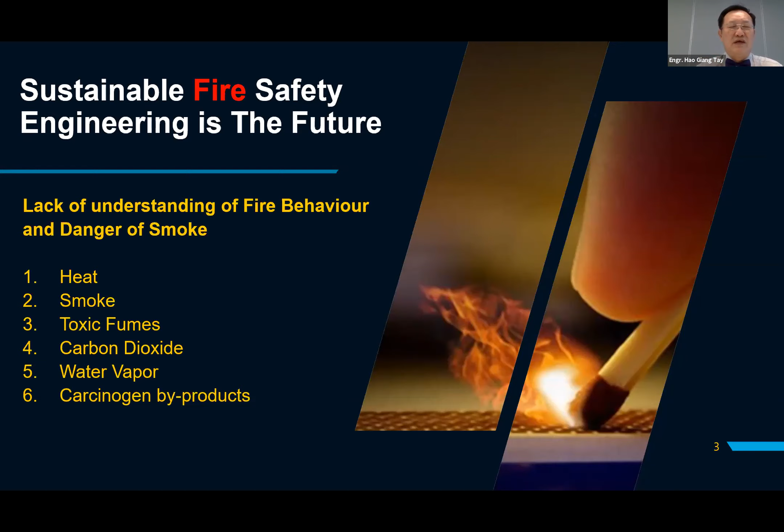Hence, a lot of firefighters in the US and the rest of the world slowly contract cancer years after they retire. Actually, the latest research by UL revealed that whenever they came out of a fire scene, their jackets, helmets, everywhere is deposited with toxic smoke particles. When they undress in their stations, all these particles become airborne and are inhaled. So there are a lot of risks, not only for the occupants but also for the firefighters.

Now, in order to strategize the fire safety design, I think we have to look at fire safety fundamentals. First of all, we need to understand the fire safety principle and the fundamentals. This is the prerequisite for all designs, and hence all these should be introduced during the preliminary stage of any project.

Fire safety design objective: the main objective should also be life safety. If you look at our UBBL, most of the bylaws are actually life safety priority. Then you also need to understand UBBL 1984 with Amendment 2012, and the Code and Standards.

But then, do you think full compliance to building regulations, codes, and standards really gives you a safe building design? It's not necessarily so, because there have been a lot of studies done over the years, and we find that at times you need to go beyond the regulations and standards. That is because until you understand the fire risk and fire hazards within the building you're going to design, there's no guarantee. I'll give you a good example.

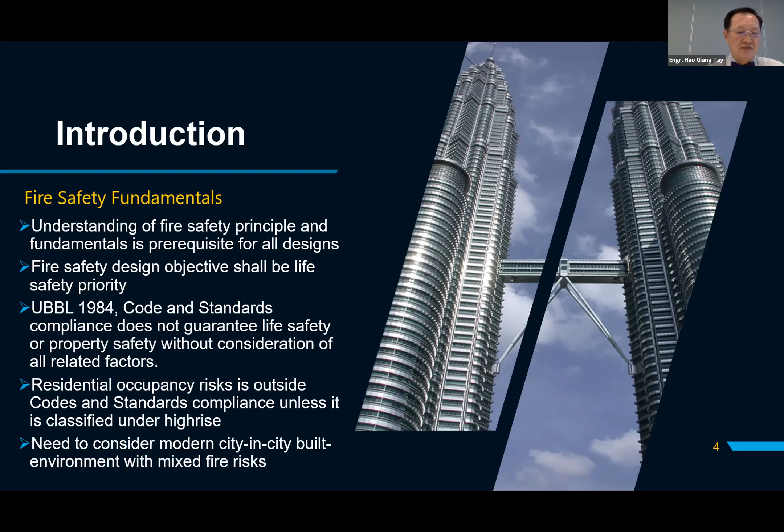Currently, residential occupancy risk is also outside code, standards, and regulation, unless it's high-rise buildings. And we are still arguing whether to put in smoke detectors, whether there should be a sprinkler, and all that. I'll leave it for other platforms to debate on this. Also, we need to consider modern city-in-city built environments with mixed fire risks, and it has been proven in many fire incident cases around the world, including in Malaysia.

If you look at our current building regulations, also in the rest of the world, they are all prescriptive based. Now, prescriptive based codes and standards or regulations are actually good for normal standard buildings. But if the risk goes beyond the parameters defined by the prescriptive code, then you need to look at a performance-based approach. Having said that, even prescriptive design, you still need to look at fit for purpose and performance approach, because gone are the days whereby you just take a data and design according to it and hope for the best. It doesn't happen that way.

So deemed to satisfy design may not work at times, depending on the type of building. Design concept must be fit for purpose. That means it's not just assuming that it's going to work, all right?

Fire hazards and fire risks at the moment are not factored in, because if you're given a building, architects just design according to what they call data given or specified in the regulation, UBBL. I'll give you another example.

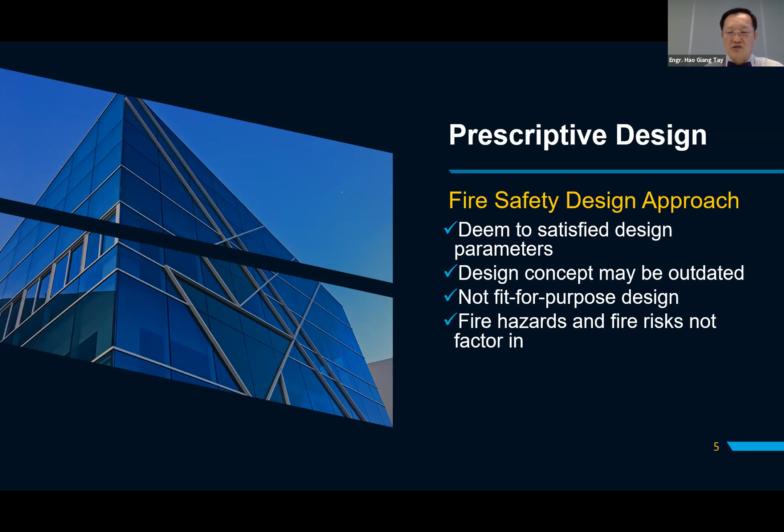If you were to design, let's say, an egress path, normally you look at floor density and then you look at what is the width of the protected corridor, egress path, including staircase. In my second chapter this afternoon, I will show you that that is not sufficient, okay? Because we never take into consideration human behavior.

There are limitations for high-rise or mega-sized projects. We all know that if you look at compartmentation, it's impossible to design a mega-sized shopping mall or a sports complex, or even for that matter, any transportation hub. Airport terminals nowadays, if you look at even the rail terminals, they're huge.

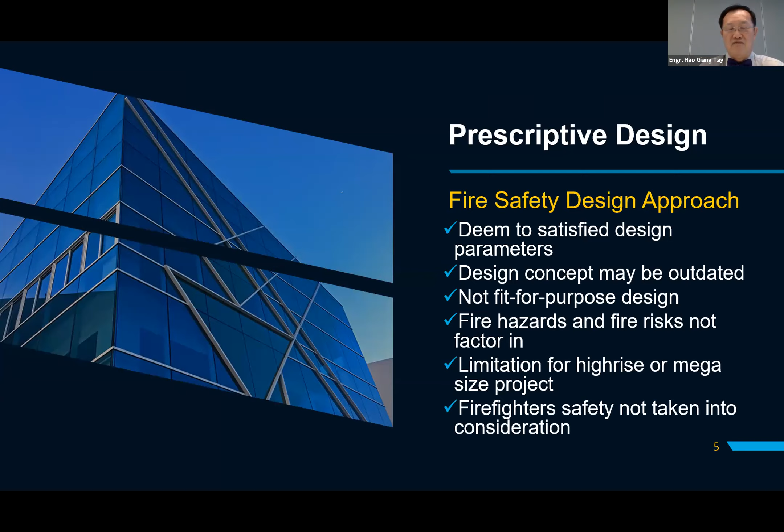Firefighter safety is not taken into consideration as well. Now, we need to understand that structure stability is very, very important. It's because when everybody is running out during any fire incident, the firefighters are the ones that run in, and they're going to spend some time in your building fighting the fire as well as searching and rescuing for occupants that are still trapped inside.

It doesn't take hours. Similarly, if you look at high-rise buildings, it's going to take very much longer for egress. I will not elaborate on that. I will reserve it for the paper after this.

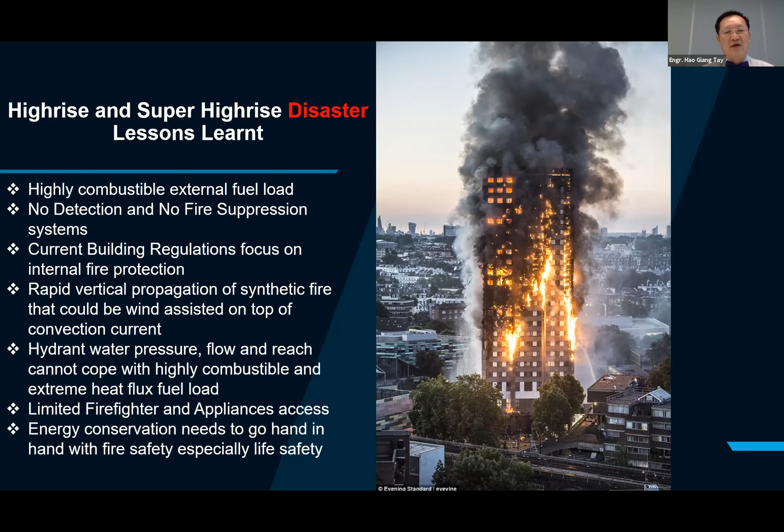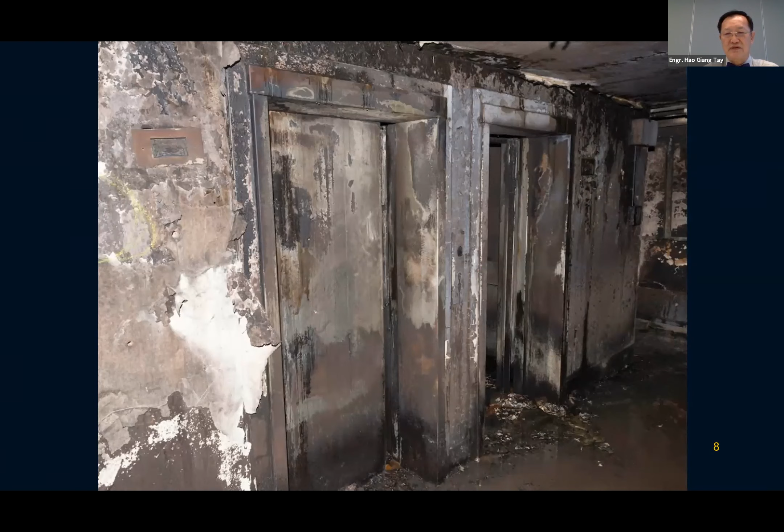The entire compartment was actually burned, you can see that, and this particular Grenfell Tower was actually just renovated, and they even have double glazing windows. They spent something like 16 million on renovation, but very, very little on fire protection. Very sad. You can see that even the window melted because of the temperature, except for the metal that is left, the rest of it is gone.

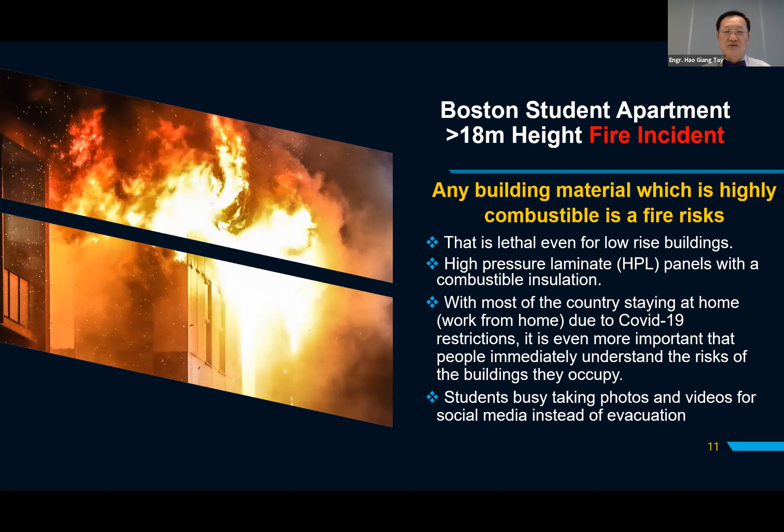Fire is ferocious - it's not only plastic that burns, anything wood-based also burns. The other area of concern is the curtain wall system. During the last few years, a lot of steel and glass high-rise buildings have come up. Now it looks majestic, except that there's actually a gap between the curtain walling and the floor, and this acts as an external chimney. So this is another area that needs to be resolved.

Now, does compliance with prescriptive building regulation in design make a building safe? I think you've got to go and think about it. So far, there are a lot of fire cases that have been investigated which reveal that building regulation only stipulates a minimum fire safety requirement for authority compliance, which may not be sufficient to address life safety issues.

You can look at the project you are doing and think about it, because normally when you design a building, they are all empty. Once the building has completed CCC and is handed over, once it's occupied, who comes in? The interior decorator, interior designer will come in. But whatever they introduce to furbish up the building is not taken into consideration in terms of fuel load and the risk of fire happening during the design stage of the project.

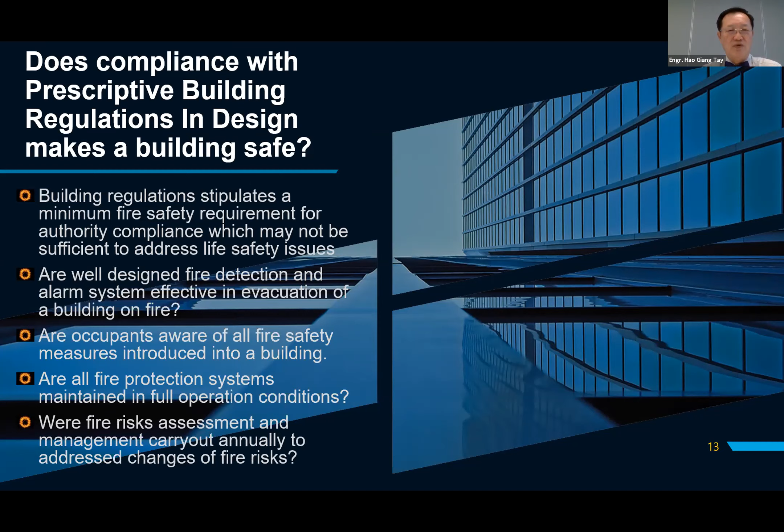Are fire risk assessment and management carried out annually to address the change of fire risk? I don't think so, unless of course it's a big corporate - people like Twin Tower, they do that. People like KL Tower, KL Communication Tower, probably do that too. The rest of the high-risk big corporate offices do that, but what happens to the other probably 75% of buildings, especially hotels and the like?

We actually try to outpace each other. All the countries are now competing to actually build higher. Of course, there are a lot of commercial reasons. One, the land cost is very, very high.

Secondly, whoever builds the tallest will then claim that they are the iconic building in the world. As we are now talking, Saudi Arabia is going to build one tower that is about a kilometer up in the air. Engineering-wise, architectural-wise, definitely it is possible to build. But then in a country with so much land, why do we need to build that high?

The question is being asked, and whether at the end of the day, you need to actually introduce a lot of fire safety strategy to make sure that all the occupants are safe during any fire incident.

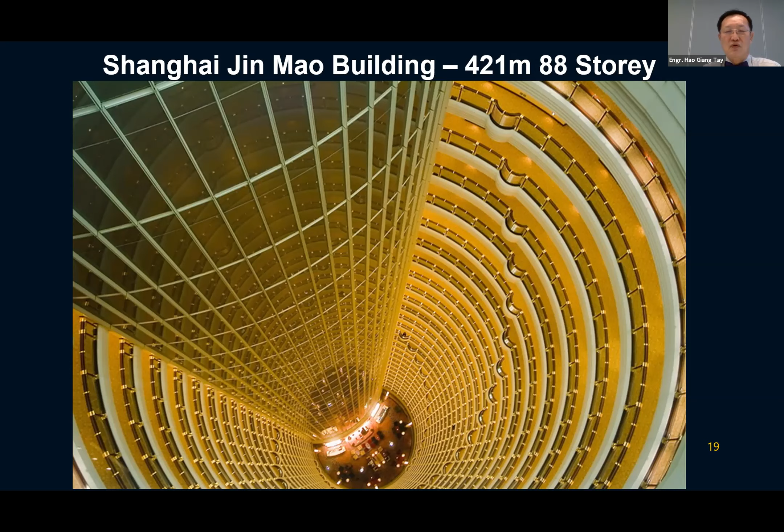So they have a double steel structure column that ensures the whole structure is very stable. Not only that, instead of using a water tank for transfer of weight during seismic actions, what they do is hang a 30 feet diameter steel ball to counteract the pendulum motion of the building.

It's a fantastic building, and they introduced a lot of fire safety measures, including movable compartment walls that are hidden in the wall, and then move out during a fire alarm stage to ensure that all the egress routes are protected.

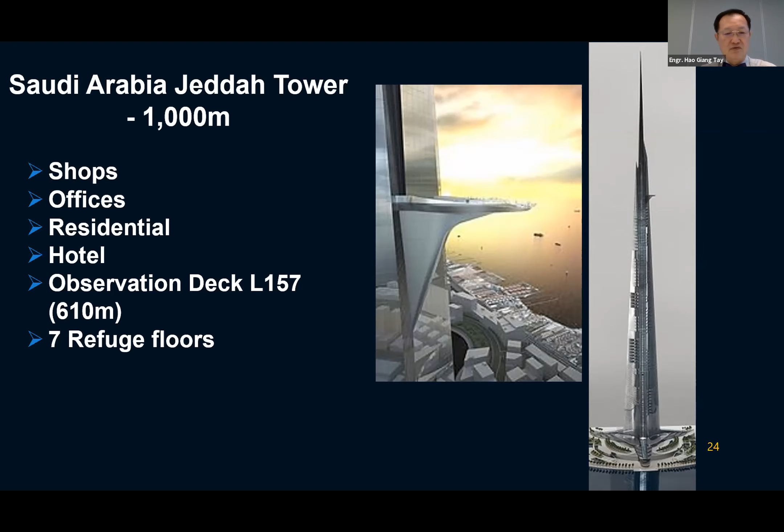Imagine you're going to pressurize a staircase of 1 kilometer long. It's going to be a huge task, and there's going to be a lot of what they call huge costs. So refuge floors actually provide a lot of solutions, which is very good. Not happening in Malaysia yet, all right? Perhaps you should start looking at that.

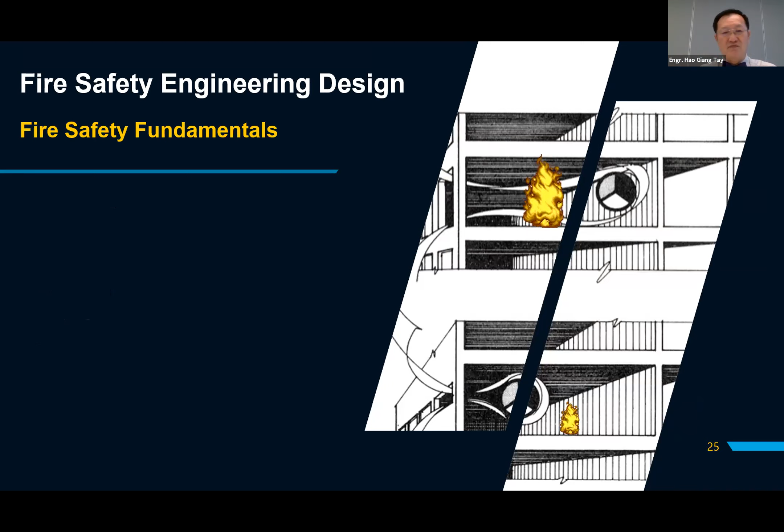Okay, fire safety fundamentals. If you use fire safety engineering design, you've got to look at applied fire and smoke behavior.

If you see the two diagrams I showed, the fire is smaller in the diagram below because of the design of the windows. If you design two windows of equal area but place them horizontally, the air during a fire—when it's burning, it needs air. Any combustion needs air. You draw in fresh air through the window, the glass will break, you draw it in, and the hot air is then allowed to escape at the top. If your window is designed this way, the inflow and outflow will be limited, so the heat produced and the fire size will be much smaller.

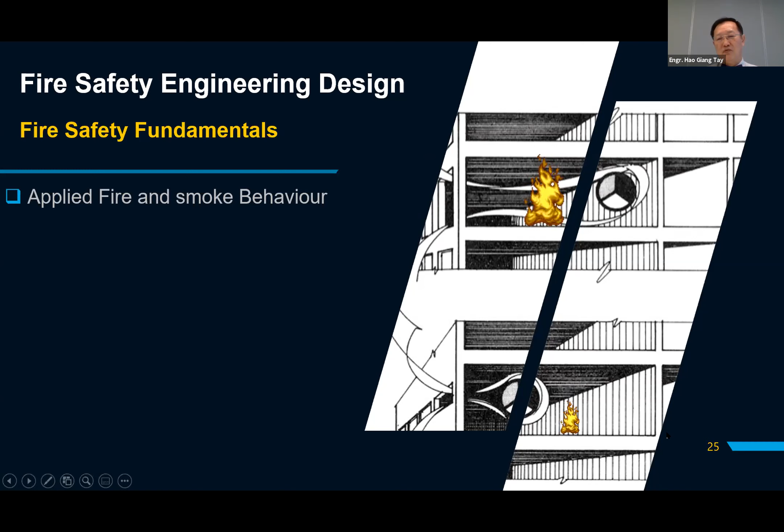If you turn the window the other way around and design it this way, imagine there'll be a smooth flow of fresh air and the hot gas going up. That's the difference, even though the compartment size is the same.

So there's a lot to learn from fire and smoke behavior when you design fire safety. Human behavior at the moment is never taken into consideration as far as prescriptive code is concerned. Compartmentation—the moment you compromise on that, it doesn't give you any safety at all.

For example, if you have a 4-hour wall and you open a door to allow traffic flow between the two compartments, you definitely need a fire resistant door set.

You know that a sprinkler system is not favorable for certain chemicals that are water reactive. If you look at the explosion in Beirut, it's actually very, very scary—it took out probably 20 to 30% of the entire city.

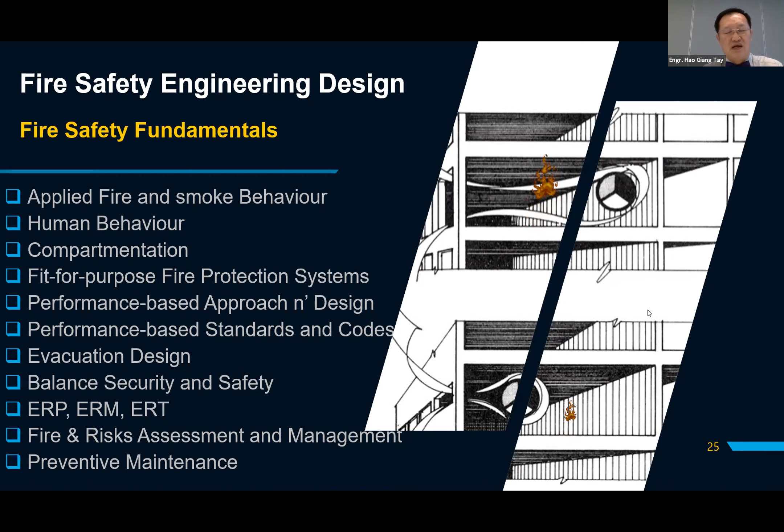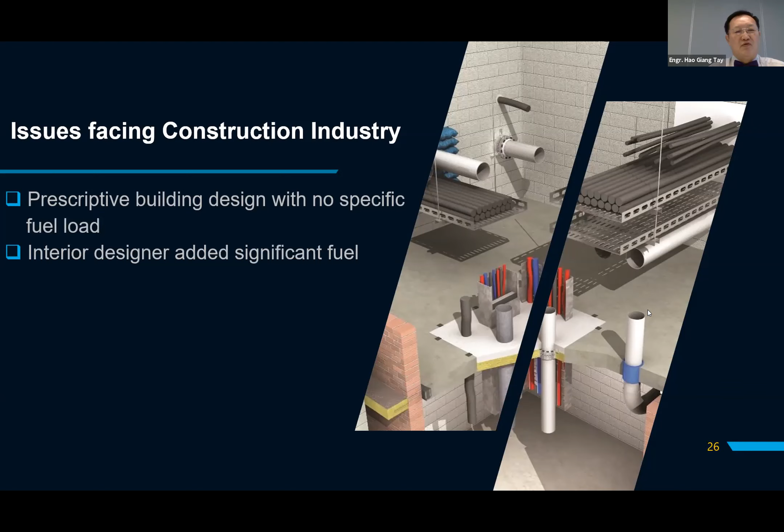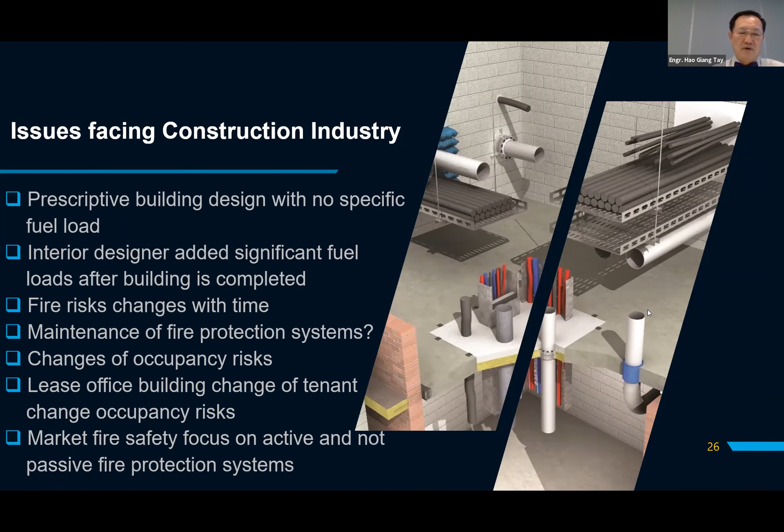Issues facing the construction industry: prescriptive building design with no specific fuel load. Interior designers add significant fuel loads after the building is completed. Fire risk changes with time, maintenance of fire protection systems, change of occupancy risk—lease office buildings, change of tenant, change occupancy risk. Market fire safety focuses on active and not passive fire protection systems. And of course, there's a lot of industrial pressure to reduce or meet only the minimum requirement for approval.

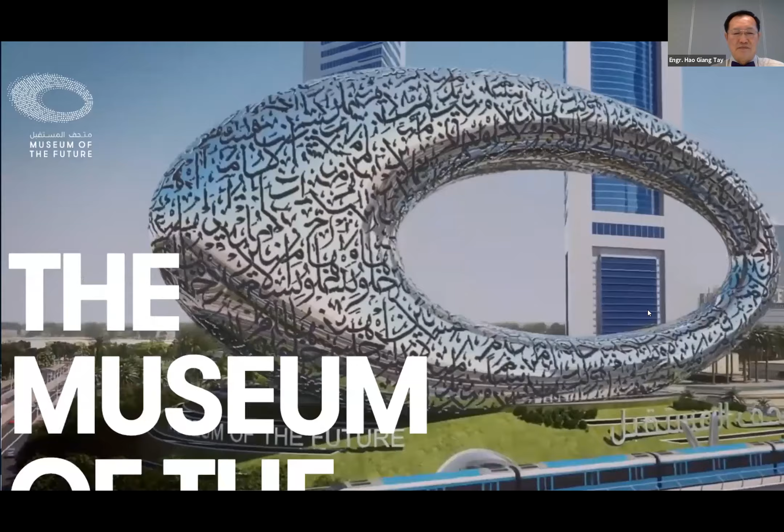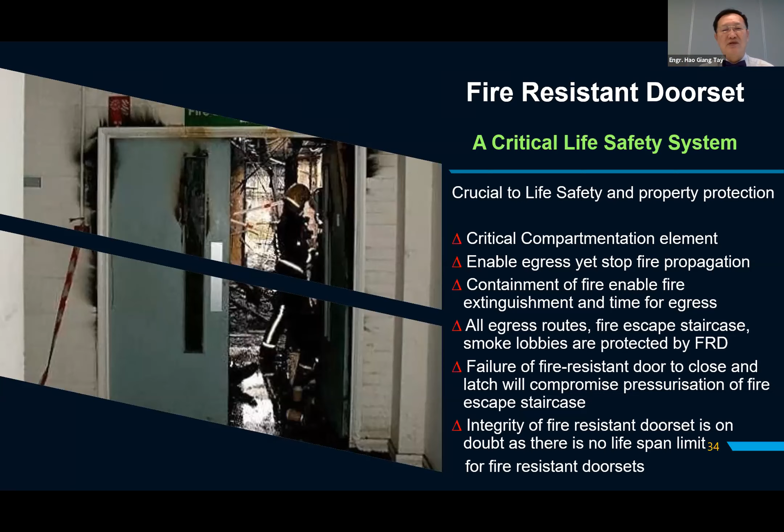To maintain a fire door's fire rating integrity, there are so many items, right? Door leaf, door frame, lock sets, latch sets, lever handle, door closer, stainless steel hinges, auto bolt for double leaf, door selector, panic exit device, intumescent strips.

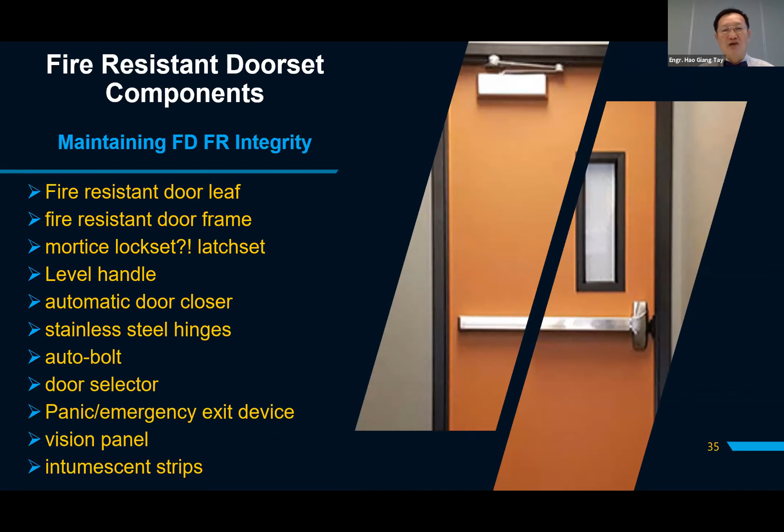So many things to look at, and they're just like your tire. You don't use your tire for 20 years. A tire's maximum lifespan is 5 years. So are doors. They're only tested for 100,000 cycles in a SIRIM lab.

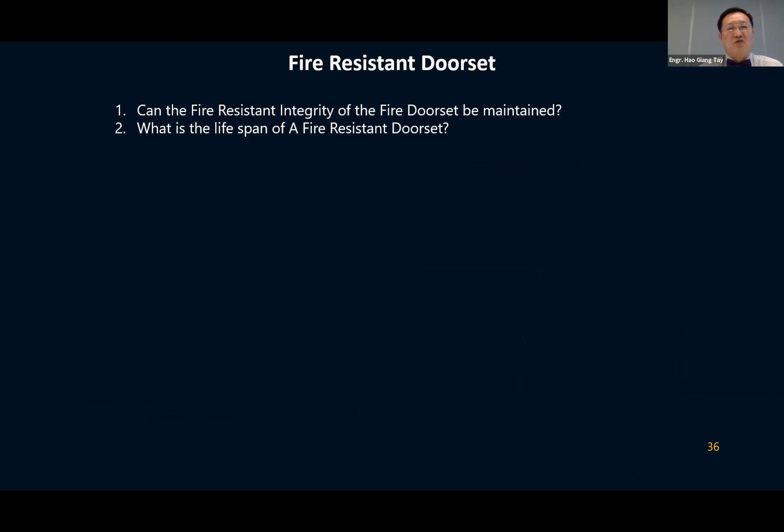Can the fire resistant integrity of a door be maintained? Of course it's not, because you're subject to wear and tear. And what is the lifespan of fire resistant door sets? Well, it's tested to 100,000 cycles. It depends then on the cyclic performance of the door per day.

One of my MSc degree students during my lecture in UIA did her dissertation basing on collection of actual statistics of doors on the market. And I can tell you, one of the busiest doors we measured together with her in a shopping complex in KL City Center, amounts to 2,600 over openings per day.

If you base on the test statistics of a maximum performance of a fire door being 100,000 cycles in SIRIM, divide by 10 years assuming the door lifespan is 10 years, that's 10,000 times per year. Divide by 365, the door can only open 27.4 times a day to last for 10 years. Imagine if a shopping center door opens 2,000 over times a day - it can only last for months, and yet it's still there after 20 years.

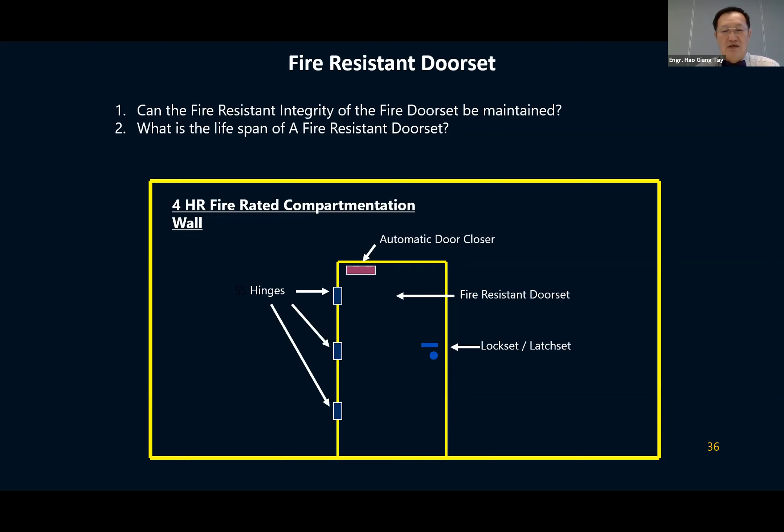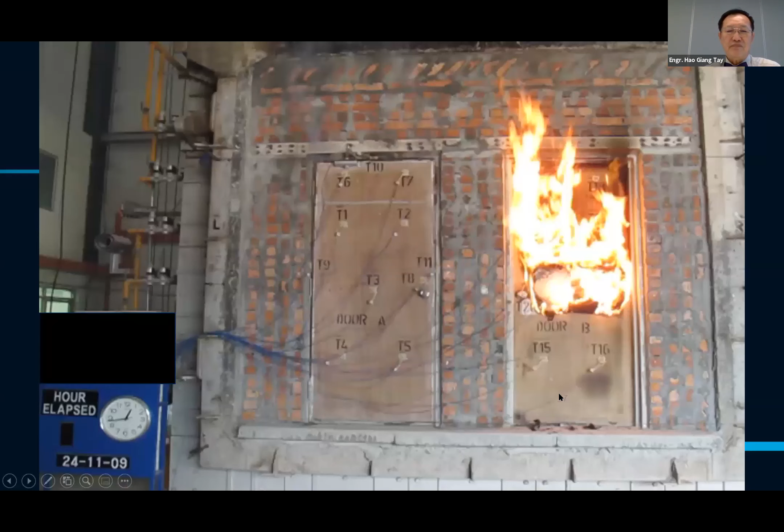Fire doors are being tested in SIRIM. If you look at these doors, quality control is very important. These are doors subject to OMS, open market sampling test, after they got the license, and this door failed at 40 over minutes, not even 45 minutes, with a big hole burning through.

So be careful when you select doors. It's not just about being bomba approved. You need to read the test report. You need to actually look at the door that they supply - is it the same door that was tested in the lab?

Mass evacuation is very, very important because we adopt mass evacuation. But perhaps that should not be the norm anymore, because for high-rise buildings, definitely you need phase evacuation. For special groups, they cannot follow the mass during evacuation because they are going to slow down the entire process. They should be identified, isolated, and then evacuated using a lift, a firefighters' lift.

So there are a lot of things that we need to relook at, and not just hope for the best.

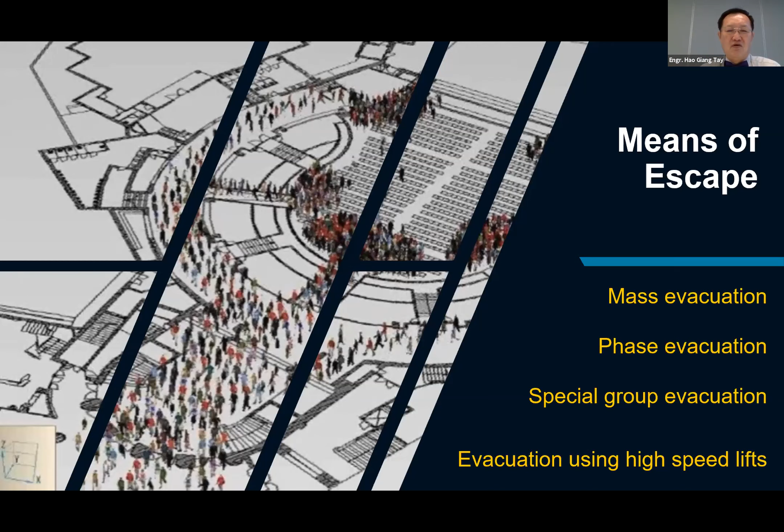How do we get out of our building during a fire incident? Of course, you look at compartmentation, maximum travel distance. And what do you mean by maximum travel distance? Relevant to who? It's not only relevant to the architect in design. You've got to look seriously nowadays at how fast or how far people can travel under the influence of smoke, or possibility of smoke.

And what about alternate and protective routes? Are there any alternates? Dead end limits, fire and smoke doors. We haven't even looked at smoke doors. All our smoke lobbies at the moment only have fire doors. In fact, we'll be looking at fire and smoke doors in future, meaning once you put in a door, there's no possibility for smoke to come through the door gaps.

Then pressurization is very important. Smoke control is even more critical for mega-size projects. And I think for high-rise buildings, super high-rise structures, mega-size, you need assisted and organized egress. It's no more free-for-all.

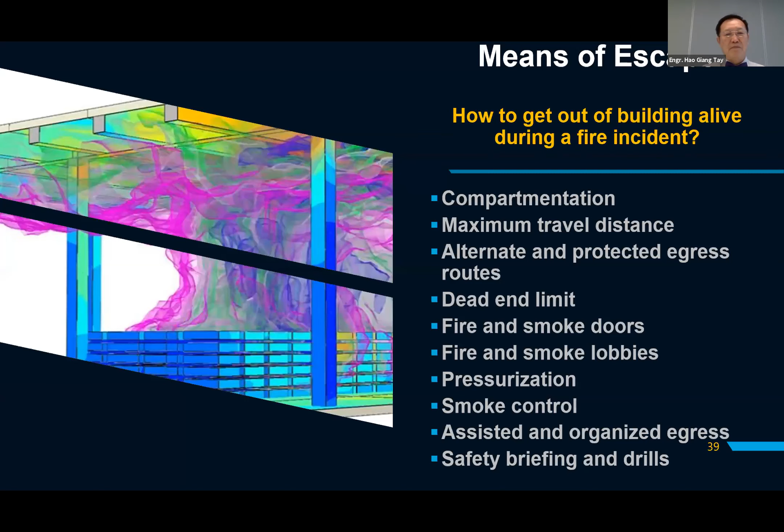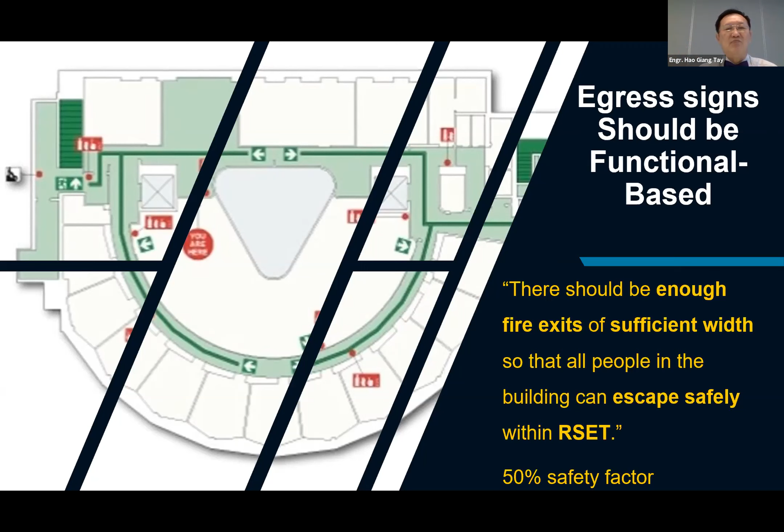About that, why do we still put exit and emergency lighting on the ceiling? Because that is where the smoke is going to flow, and that obscures everything. You see nothing. In China, they put it on the floor. In a lot of international airports, they also put it on the floor, because we're asked to actually crawl when there's smoke present. That's where you can then see, and all these are illuminated, so you can easily find a way out.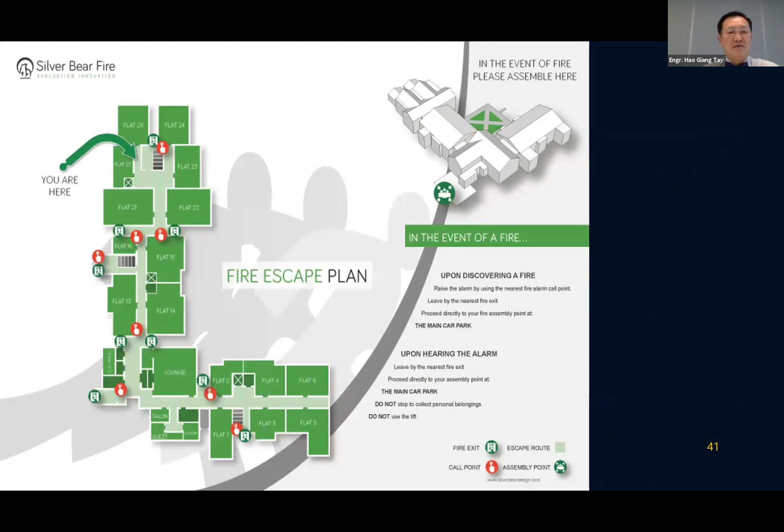So I was wondering, why do we keep insisting on putting the exit sign on top of the door? Because that's where the smoke particles are going to be. If you go to Japan and Korea, they still put it there for floors not on fire, but they also put additional arrow signs and exit signs at the skirting level. In Scandinavian countries, they even put it on the carpet, illuminated, so there's no more signage on top of the door.

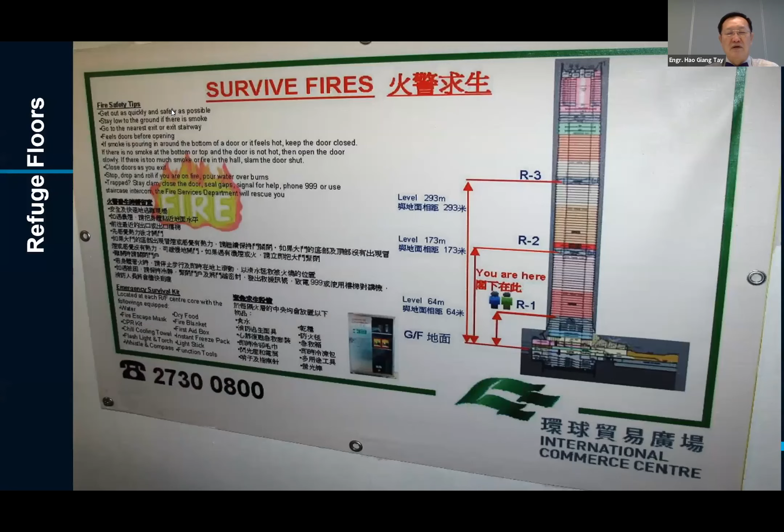This is a refuge floor. You can see that in Hong Kong, they actually practice a lot of signage, and these floors are kept clear with nothing combustible. Natural venting, because they're high up, so there's airflow through the place - you do not need mechanical ventilation.

Of course, I asked my friend in Hong Kong a critical question: if there's a floor on fire below, the smoke is going to flow up, so what's going to happen to the people in this particular area? He said no problem, we have a water curtain, a sprinkler spray and all that. But to me, I think this will have to be tested in a wind tunnel. Of course, they also have steel structure protection and all that.

I'll now show you the MS 1183 fire safety code video that we did together with them.

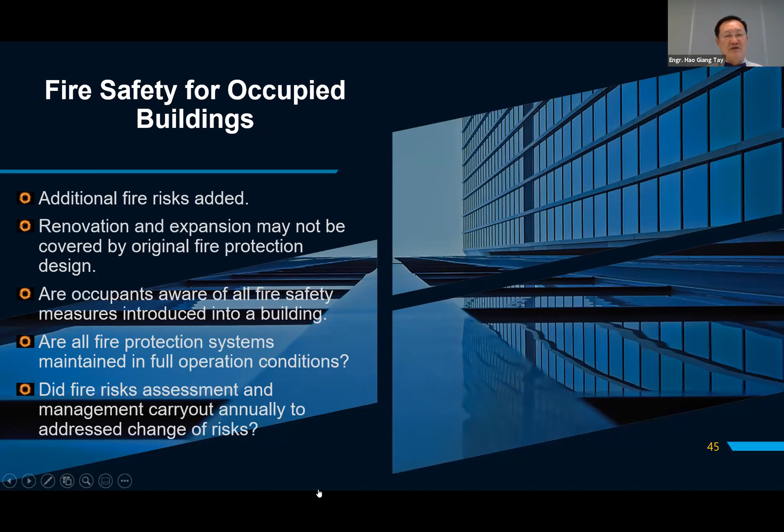Fire safety for occupied buildings - just now we were talking about new buildings. Additional fire risk is added; renovation and expansion may not be covered by the original fire protection design. Occupants might not be aware of all the fire safety measures introduced in the building. And as I say, a lot of times, if you look at existing buildings, maintenance is not there.

And I believe in the next 5 to 10 years, there'll be a lot of changes in the fire protection industry, and we can then use all these new technologies, IT and ICTs, to help fire safety.

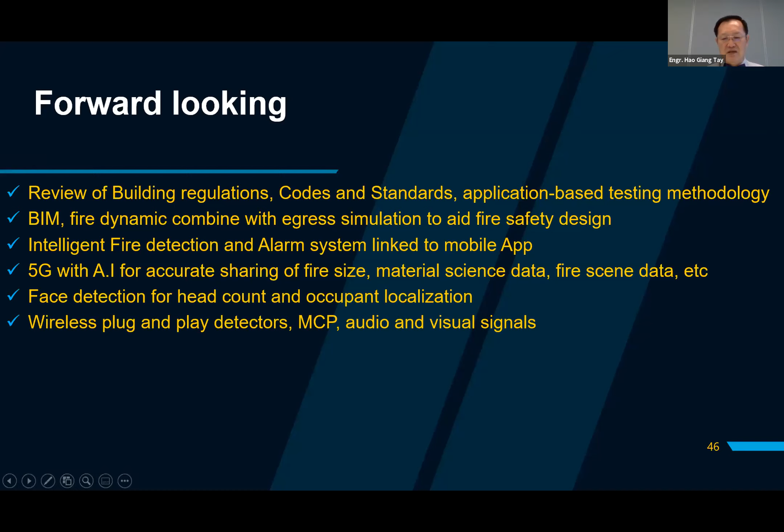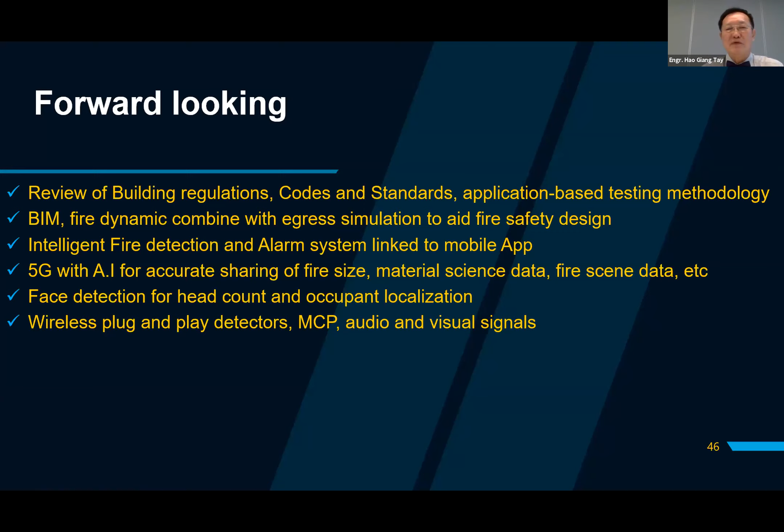My slide stops to move. Mr. Chee. Okay, thank you, Mr. Tay.

Mr. Tay, thank you for a very interesting talk on what you call looking at fire beyond the confines of uniform building bylaw. I'm sure the architects who are here today, if this is the first time listening to Mr. Tay, will begin to appreciate the complexities involved in looking at issues beyond the minimum requirements under the uniform building bylaw. Mr. Tay, can you put your slide back on page, slide number 24, please?

While I let the participants know, we will be discussing. There was one question put up during the session done by Mr. Tay. We'll be looking at that in a moment, but just a little quick recap of what Mr. Tay has said for the participants here. Slide number 24, the one that shows the different window opening sizes.

Oh, okay. Wait, hang on a second. Okay, while Mr. Tay is looking for the slide, participants...

Mr. Tay touched on the need to understand the science of fire and the interaction of the chemistry of fire with respect to the way fire interacts with different materials, with different outcomes and chemical reactions, and the effect on life safety as a result.

He touched on how the UBBL being prescriptive is based on the minimum generic requirement, and there's a need for designers to analyze whether that minimum criteria is appropriate when looking at designs.